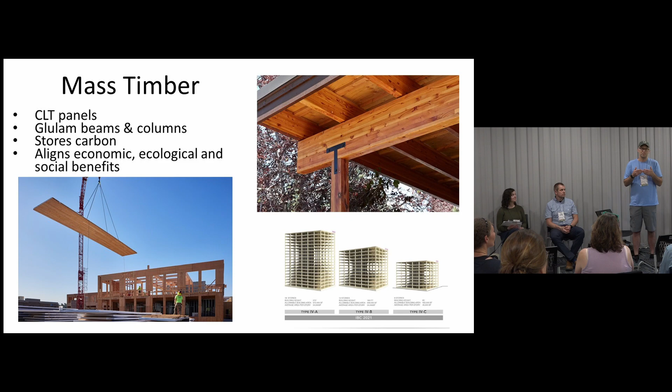But between those, you get your skeleton. And as we heard about earlier today, this is something that's really interesting and exciting for so many people because it stores carbon in the built environment. And what I love is that it aligns these economic interests with environmental interests. And often those are perceived as these conflicting things, and they don't have to be. And this is just a great example where everyone can pull together in the same direction. We're thinking about glulam.

When we say lam stock for Glulam, that's just a fancy name for lumber. When you have, let's say, 2x6 lumber, you call it lam stock. The lumber we're gluing together is often 2-inch thick, and it can be variable widths. So depending how wide you want your beam and how deep it is, you can have a certain width, like 2x6 would be a 6-inch wide beam. And then you can just start layering 2x on top of that to get whatever depth you want.

Are you using just raw lumber, or are you getting it dressed? You have to get it dressed. You're getting it dressed at 2 inches? Yeah, or actually, it's less than that. So you're more than 2-inch rough, sorry. Yeah. And so the idea is dressed lumber, so you cut nominal sizes, like a 2x6 is nominal. We're calling it 2x6, but it's actual sizes once you plane it all down flat. That's a great question.

Is there a benefit to gluing it together rather than just screwing it together? It's just a different product, and I'll let Ricky answer that. Yeah, Paul, probably the biggest benefit is the lack of manual labor required to drive the screws. But there are other things too, like screws perform differently long term, where screws could yield, they start to crush the wood around them, and you get more and more deflection over time. So the adhesives provide a better long-term stable product. Structurally, it unitizes the beam. The glue does? It unitizes it, it's all in effect one piece.

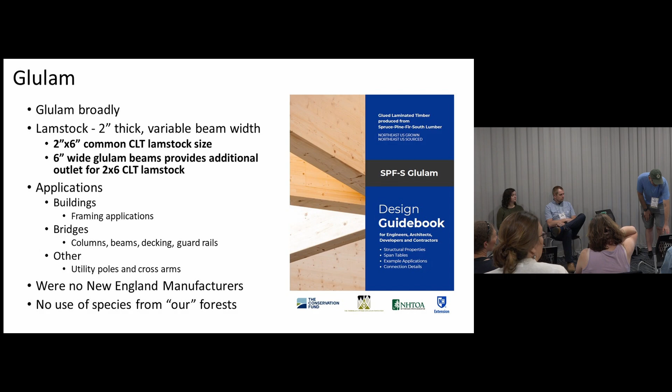So this can be used for buildings, bridges, which we'll hear about, and there's even some other applications and markets for Glulam. We don't have any New England Glulam manufacturers up until now, so that's why we're so excited about this. And we haven't had Glulam from species in our forests. There's SPF Glulam made in Canada from Canadian forests. But red spruce grown in the US is SPFS, while red spruce grown 5 feet over the border is SPF. So there's SPF Glulam, but there's no SPFS Glulam that I'm aware of, and certainly not around here.

So south doesn't refer to the south, it refers to not Canada. To the Canadians, we are south, believe it or not. Guess who came up with that? As opposed to SPF here.

Right. So we don't have any right now, but there have been Glulam manufacturers in the past. Glulam's been around since the early 1900s. The issue's been other parts of the country and the world make it cheaper: cheaper labor, cheaper energy costs, and the species currently used for most Glulam products are a little bit stronger. Maine's a leader in great research, and they've done work over the last couple decades looking at ways of making Glulam stronger and more effective in the region.

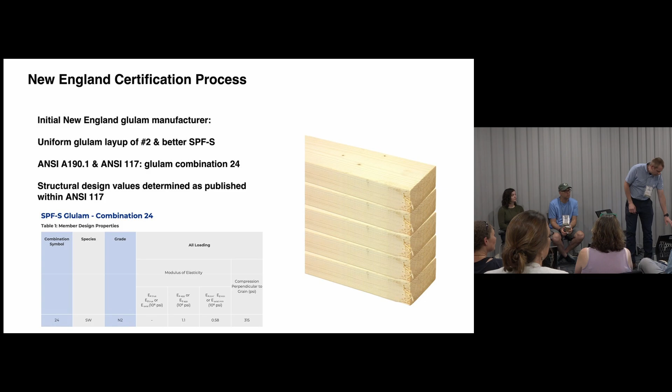Been part of this project. So the initial layup or combination of how the laminations stack together, like Andy mentioned, is all number 2 and better SPF South, which is called a combination 24. In the process of doing this work, we did create a design guide, so it has a lot of design values in it, which I'll share more about a little bit later. It does have pre-established values, but like Andy mentioned, it's sort of interesting. We had to go back to the 1993 version of the standard to kind of resurrect those values. I think we've talked through most of this. This is the press that you see in the Springfield, New Hampshire facility.

So Ricky, there's a question, but also, you have to squint real well if you want to see. I'm squinting here. Sorry. Just a question about the press and the glue applicator for the facility. Did you guys run into any challenges with emissions permits with glue? That's a good question, not that I'm aware of, but I don't know if they had to deal with that at any level. Glue's usually pretty low VOC. Most of the stuff is pretty innocuous. Just water-based. I think I've got a cut sheet. Hopefully. That's why I'm asking.

It's a good question. I hear lots of questions or concerns sometimes around the glue and whether or not, especially in a facility that also has kilns and maybe is towards the top end of their emissions permit allowance, it's something that could be added on. Right, that's a good question. I think you're right. Low VOCs is what most adhesives have. There's been a lot of concerns too with formaldehydes in adhesives. So most manufacturers now are using formaldehyde-free adhesive, polyurethane types of adhesives. There are a few glulam manufacturers out west that use resorcinol formaldehyde, I believe. I think urea formaldehyde is what people typically think of as the bad type of formaldehyde, but there are several types.

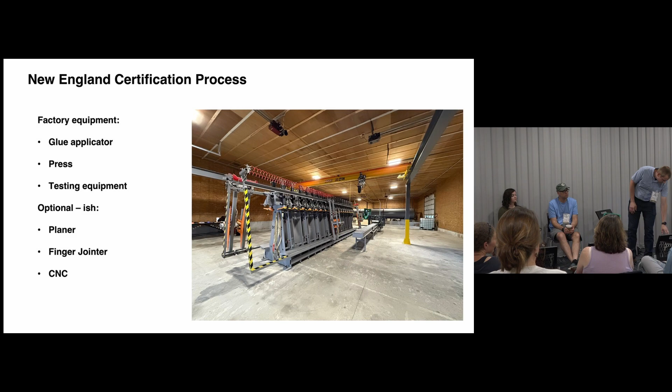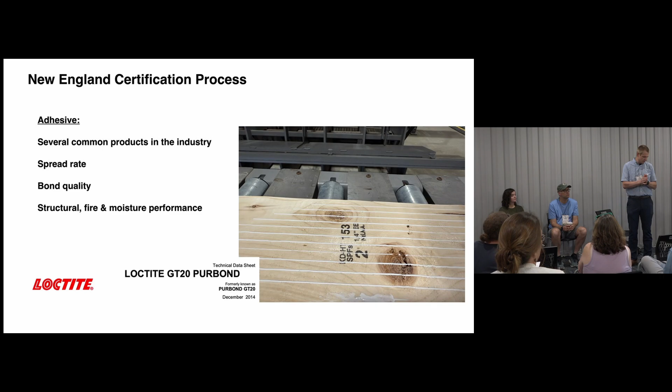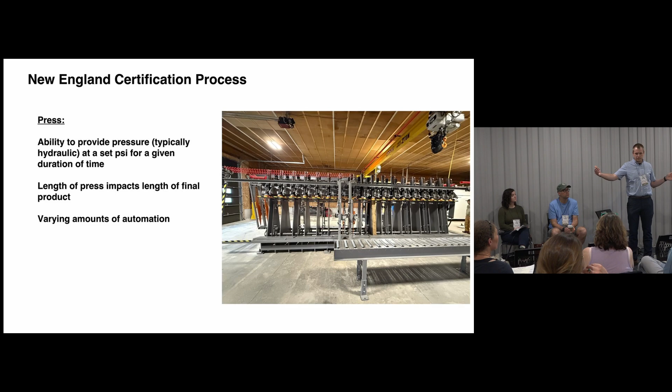Probably self-explanatory here, but obviously the size of the press, both in terms of its length as well as its depth, is going to dictate how large of a member can be produced. In this case, they're able to produce, I think, almost a 4 foot tall or deep beam, or you can lay that on its edge for decking. But their lengths, because they don't have a finger jointer, are basically capped at what you can buy, which is usually 16-foot lengths for lam stock.

One of the interesting things you have to do in the certification process itself is you have to glue two Glulam members essentially. One of them you put in the press right away. The other one you leave without press. The glue's on it, but without press for the maximum amount of time you're allowed, what they call open glue time, which is the glue's on, but you're not pressing it. So you're basically testing both ends of the spectrum so that you're safe whenever in that window of time you can still press the material. So just one of the interesting things you have to do.

When you stack the wood, do you take a look at the end grain and mix it up? Not typically, you're not required to. That's probably something you would do if you're very concerned with the individual aesthetic of the lumber, but you're not required to. Not for strength? No.

So again, I sort of mentioned this earlier, but one thing that was a lesson learned was dimensional tolerances. So we basically had to take the lumber to another local mill and get it planed the day of. It ended up working out great, but that's something that they'll have to do going forward, essentially that replaning process. You're checking moisture content. It needs to be a little bit lower than typical graded lumber. I think in the end we were fine. We didn't have to do any additional drying, but you want to be in the 13, 14% moisture content range.

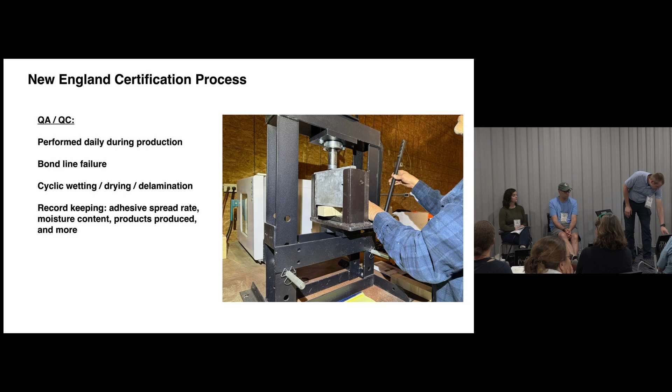There's also, I think I might have a picture of it. Yeah, this right here. This vessel that you see here is an autoclave. So basically, you put a couple of wood samples in there. You fill it up with water. You put it under pressure. So it's forcing water into the wood.

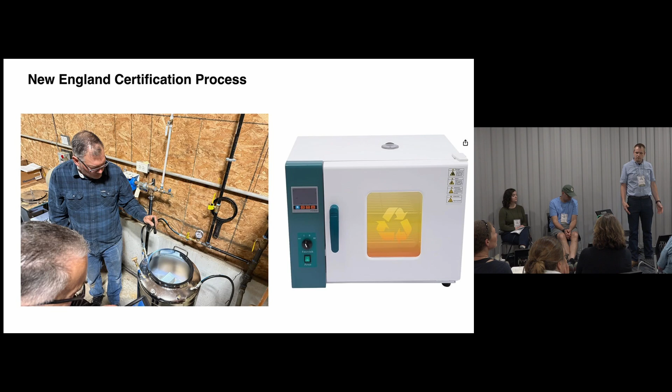Then you take it out of there, you put it into an oven, you dry it back out as fast as you can. It's mimicking wetting and drying cycles over a long period of time. And then you're doing some evaluation of that wood. You're trying to check for adhesive performance for moisture. These products aren't necessarily intended to be used in permanent exterior applications, but during construction, with seasonal changes in humidity and moisture content, there will be some fluctuations, so this test is intended to make sure that the adhesives hold up.

And then all of that, meaning all of what you're doing on a day-to-day basis. Yes. Sorry, weren't they just building bridges out of that? Did you say it was supposed to be interior? They were. For this particular adhesive type, yes. Okay, so that's just for that test. Yeah. The other thing I'll say too about the bridges that they're building is that technically the adhesive is not doing a whole lot structurally, because these glulams are stacked like this, but then they're turning them on their edge. So basically it's helping keep the panel stable while they erect it, but long term, each individual 2x is what's structurally spanning between these girders.

Yeah, exactly. And then all of that is contained in a manual that they have to create and maintain over time. Like I mentioned, the certification agency comes back once a quarter, looks through their manual, looks at what they're actually doing, do they match, and then they're keeping daily records of all of these tests. So like Andy mentioned, for a small business especially, it can be quite involved to do that record keeping. Obviously it's necessary, but it is a big task. I think I'm gonna hand it back to Andy for this part.

So each piece is stamped, and I think depending on the length of the member, some pieces have to have multiple stamps. So I just thought it would be nice. I was going to show this slide, but now I'm going to ask everyone to close your eyes and imagine what I'm going to describe here. So this is just sort of a flow diagram. Oftentimes when we're thinking about this market development, it's super exciting. We should get someone producing glulam, and there's all these barriers along the way. And I'd just like to point out some of these challenges.

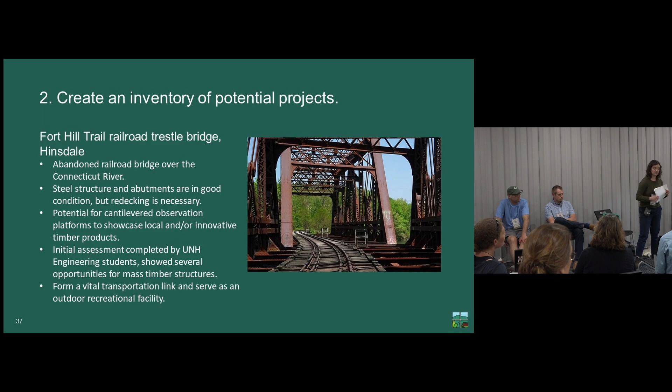So there's another trestle bridge in Hinsdale, and this is a Hinsdale-Brattleboro Greenway. And so there was a new bridge. You can see the curved part that was opened this winter, and it essentially left the 2 trestle bridges in the island out of use. And the Hinsdale-Brattleboro Greenway has been in progress conceptually for a very long time. So potentially using Timber for Transit funds will help to make these dreams a reality.

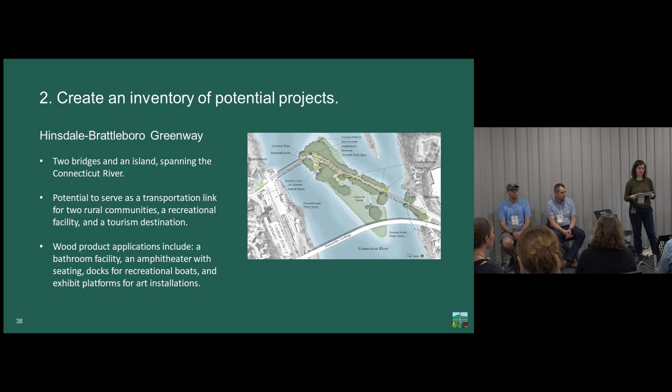The hope is to transform the old infrastructure into a greenway that could serve as a recreational and tourist attraction. Potential timber applications also include bathroom facilities, an amphitheater with seating, docks for recreational boaters, and exhibit platforms for art installations.

This third bridge is Hill Road Bridge over the Darby Brook in Alstead. So this bridge failed in 2012 and was temporarily replaced by 2 single-lane steel logging bridges. And this is a short span bridge that could serve as a great example of the strength of mass timber because it needs to withstand logging operations and gravel operations that run on that road. And it could be an example of how we can fix some of these short span bridges that may not qualify for other types of funding, state and federal.

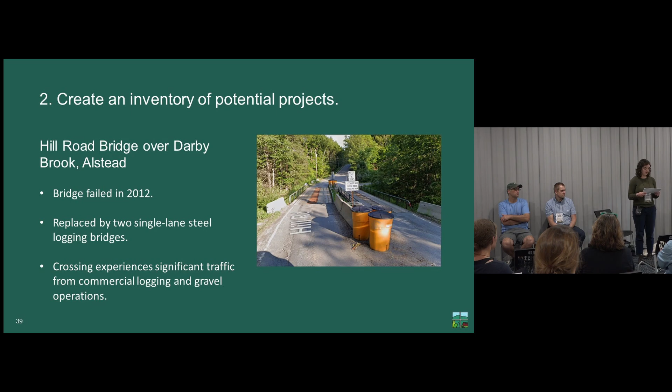So it would be great to have some kind of pedestrian crossing, and what kind of crossing that will be will depend on the historic preservation requirements. But it could be attached or cantilevered. And again, this one is a great example of how mass timber can fit with the aesthetic of the Monadnock region.

So in order to actually do any of this, we need to solicit technical assistance from engineering firms and pre-development services. This assistance will include feasibility studies, pre-engineering concept development, cost assessments, and then ultimately the shovel-ready engineering plans. So procurement will be conducted through a competitive process that's compliant with NBRC requirements and state and federal policies and procedures.

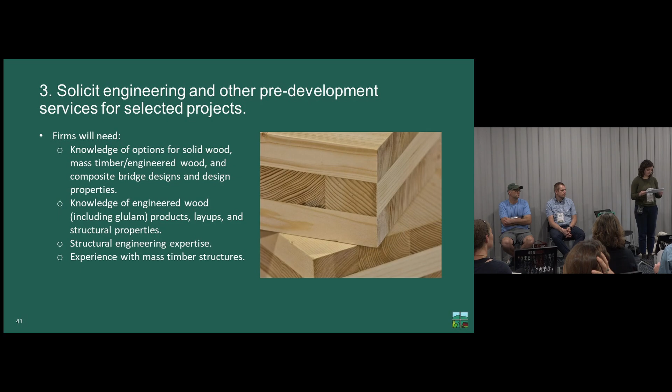Another part of this project, there are many parts of this project, is updating the existing U.S. Forest Service Forest Products Laboratory Timber Bridge Superstructure plans, which is quite a mouthful, to include local species and our local manufacturing capabilities, so in particular sawn wood and glulam. So we're working with Jim Wacker at the Forest Products Laboratory to identify these existing plans and which ones might be suitable for retrofitting for these northeastern species.

And these plans, if they're calibrated to these northeastern species, would obviously be relevant for New Hampshire, Vermont, the rest of the NBRC region as a whole. And creating this avenue for potential products to be used in these transportation projects has a potential to generate demand, especially for the innovative products such as the one that he discussed.

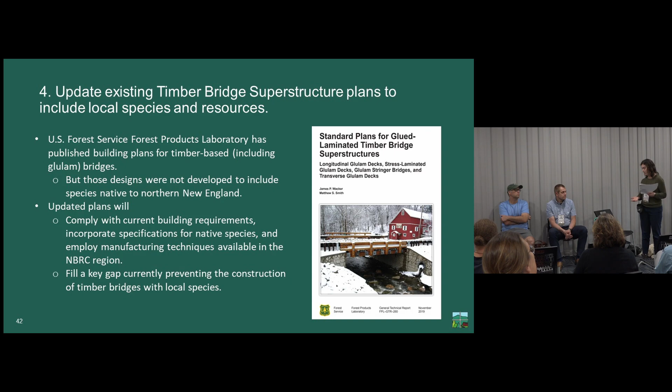So these plans were not developed with the northeastern species in mind; a lot of them are calibrated for southern yellow pine or for western species. And thanks to Andy's advice, we're also considering the method of manufacturing. He pointed out that it does not make much sense to try to recalibrate a stress-laminated structure because no one in the region has the ability to manufacture stress-laminated mass timber, hence glulam.

And having that whole continuity of the local species to the local manufacturing will help us build the local supply chain. There are contenders for these plans, and they mostly include Glulam stringer bridges, which is what you see up here, and designs that use Glulam decking, longitudinal or transverse. So I'm going to toss it over to Andy for a minute or two to talk more about plans.

Can I ask a question before you do that? What are your criteria? Are you picking all 4 of these, or do they have to go through each of these stages to get preliminary drawings, designs, costing? What are your criteria for selection? I'm confused. Of the 4. So we're still collecting nominations, and we're also still making up our working group. We don't have a set criteria list yet. Okay. We're really at the beginning.

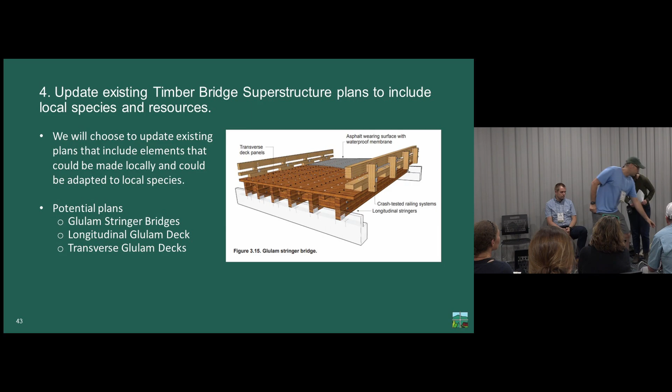So there's the red list bridges, and that was part of the criteria as I understand it. The towns have said these are our priorities in the region. And Chloe identified a process whereby a group's gonna get pulled together, there's gonna be designs related to those specific priority projects. And so that's kind of helping those specific towns. In addition to that are these general bridge plans. And so I'll just point these out. So over the last 35 years, what's that?

Who makes the decision in the end? Do the towns then decide whether they're going to go forward with each project separately, or is there a commission, or how does that work? Yeah, I think it's the towns. Every town would then choose to do this for themselves or not. Got it. But municipal bridges across the region are in significant disrepair. So this is actually a pretty big market across the region. Oh, I know the Brattleboro ones because I lived in Amherst, so I know how that works. Yeah, and I'm assuming that would be part of the criteria, a town wanting to move forward and then they would do it.

So in addition to these specific projects and assessments, just looking at timber bridges generally, the Forest Service has been doing this for like 35 years. What I love and respect so much about this project is when folks recognize the expertise and roles of other entities and pull together that synergy. As we were going through this, they were saying, we want to deal with these specific projects on the Red List Bridge, but also we want to make it as accessible as possible for towns to access plans to do this. Let's come up with a guide to do that perhaps.

And we said, well, Forest Service had already done that. And then they realized there's AASHTO standards, Highway Department standards. The old plans that the Forest Service went through don't conform to those new standards. So towns could pull those off and go through a bunch of calculations, but instead we're reducing that barrier. So once again, towns can pull Forest Service plans off the shelf with heavy timber and do those heavy timber bridges. Then the next is the Glulam superstructures.

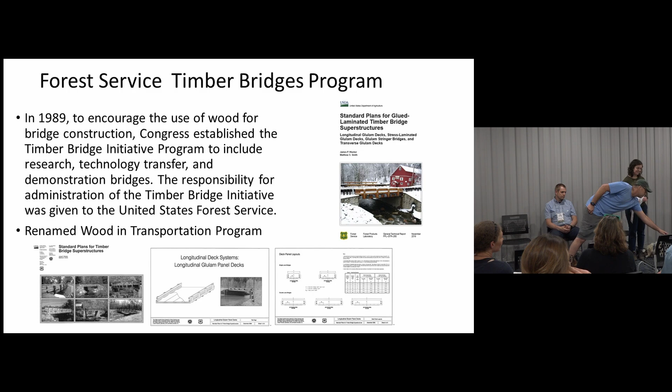Yeah, so we're not timber experts, and throughout this whole project we're really just going to be learning a lot, especially about the complexity of the manufactured wood industry and the feasibility of expanding it in our region. So Andy, of course, is key to this part of the puzzle, to understand our place in all of this. What we do know now is that there's limited manufacturing for these innovative wood products in the NBRC service area and the surrounding region, which presents a real barrier to realizing their full benefits, especially in transportation infrastructure for our project in particular.

Mass timber production for these northeastern species exists, and Glulam layups such as SPFs exist, and eastern hemlock is on its way. But again, without the demand for products, it's really hard for a facility to stay afloat and be financially viable, even though there is general sentiment that the Northeast could support a mass timber industry. And so at SWRPC, our Timber for Transit project aims to build these connections between the sectors and add whatever value we can to the decades of work already done in mass timber research and commercialization throughout the region and the country.

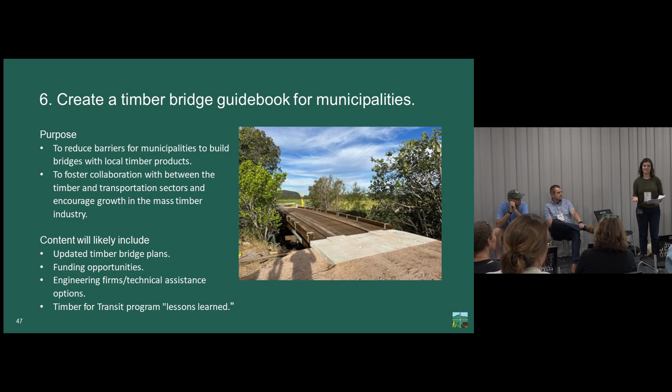So when all is said and done, we are hoping to have a timber bridge guidebook that we can distribute to our member municipalities. We just want to reduce barriers for our municipalities to build these bridges with local timber products and foster ongoing collaborations between the two sectors. This goes hand in hand with Glulam market development and encouraging the mass timber industry to grow in the Northeast. This guide will hopefully include everything from updated timber bridge plans to potential funding opportunities to options for consultants to general lessons learned by the non-experts as we wade into this world.

Returning to our main goal, we at Southwest Region Planning Commission are here to bridge the gap, connecting the timber product sector to the transportation sector, and making it easier for our member municipalities to implement these timber bridges. We hope to do this by showing that local timber products can be used for local transportation projects in our region, by adding value to these cross-sector collaborations, and by encouraging the development of the engineered wood supply chain. So, thank you to everyone who put this together, and let me know if you have any questions.

I have a question. So, Andy, you talked about some of the challenges that you and I have to navigate with market development and supply and demand; the chicken and egg problem never ends. So I'm curious with the planning commission, who called who? Did you want to do timber bridges? Did you just need bridges, and then someone told you timber might be a good option? How did this start? Yeah, so we applied for the Timber for Transit grant. But what made you think that timber for transit was the way to go as opposed to something else? That was before my time.

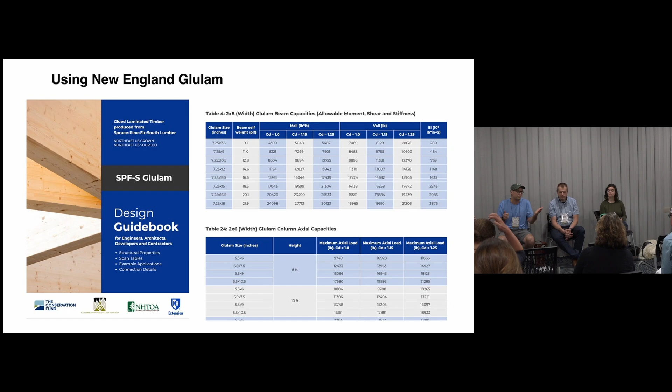I know I'm not going to go through all these because I don't have time, but the last thing I would leave you with is this. After all of the headbanging that maybe we've done over the past several years and today, I think we have to all recognize that some good progress has been made, and you can right now get CLT products and Glulam products made from species sourced, milled, planed within New England. So I think it's good to know that. So if anybody is working on projects, you can start to specify these products. Know that there are restraints, there are limitations, there's challenges for sure, but you can do that. These products are available today, and hopefully more projects speccing them will lead to more manufacturers seeing the interest and expanding or opening operations.

That's such a good point. You hear again and again, when will it come? It's literally, you pick up the phone. Right now, anyone can pick up the phone and order the product. And if people know that, and know where to go, that's amazing. So thanks. Thank you.